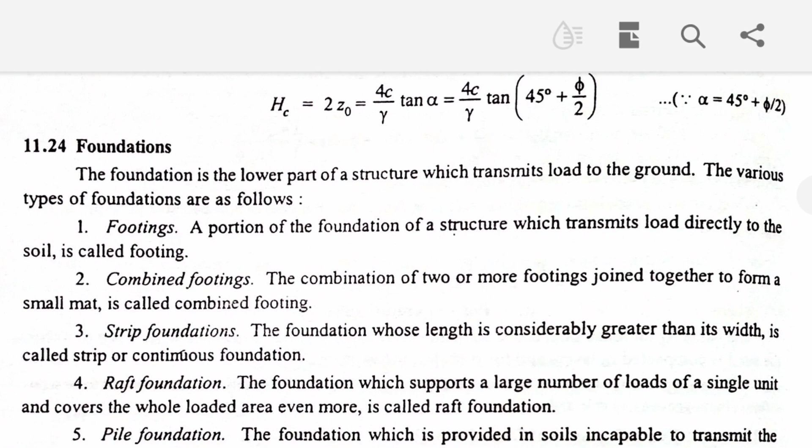देखिए foundation is the lower part of a structure. कोई भी स्ट्रक्चर का लोअर पार्ट, सॉइल को कटिंग करने के बाद फाउंडेशन स्टार्ट होता, which transmits loads to the ground. The various types of foundation are as follows:

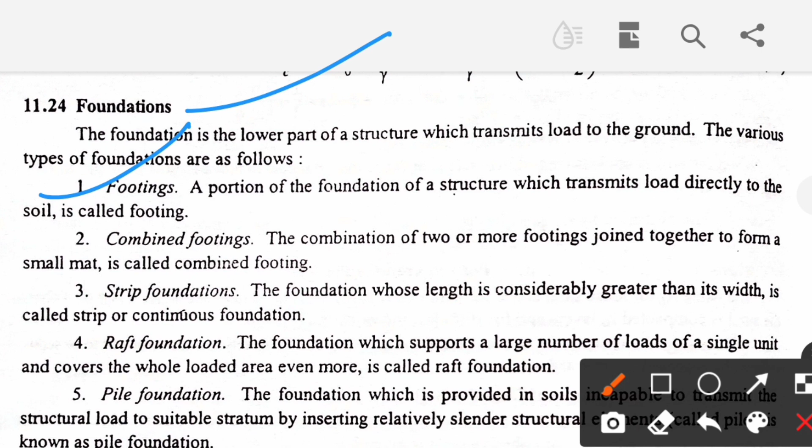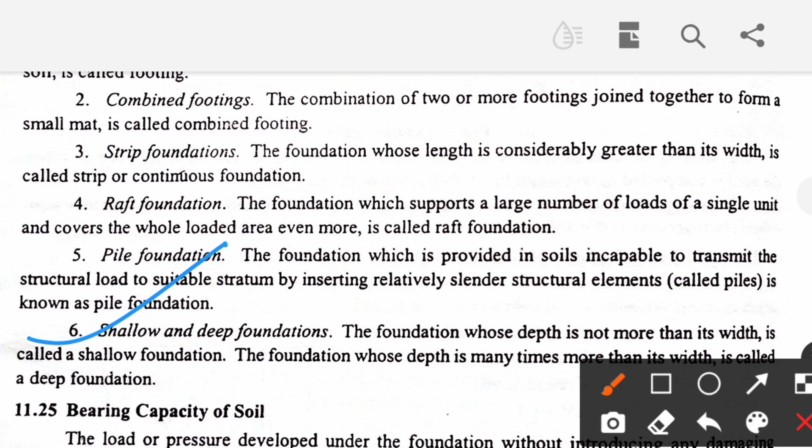Footing, combined footing, strip foundation, raft foundation, pile foundation, shallow and deep foundation. Footing: a portion of the foundation of a structure which transmits load directly to the soil is called footing.

Combined footing: the combination of two or more footings joined together to form a small mat is called combined footing. Combined footing को mat footing भी कहा जाता। Strip foundation: the foundation whose length is considerably greater than its width.

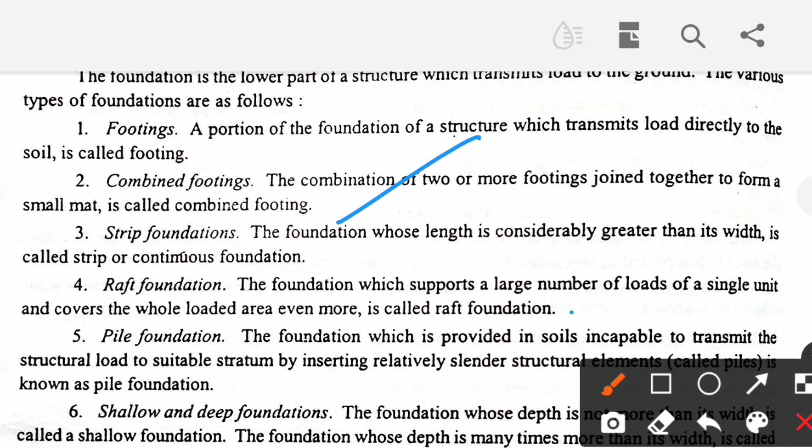Pile foundation: the foundation which is provided in soils incapable to transmit the structural load to a suitable stratum by inserting relatively slender structural elements is known as pile foundation.

Shallow foundation and deep foundation, very important. The foundation whose depth is not more than its width is called shallow foundation. Shallow foundation मतलब क्या, width बड़ा होता, depth छोटा होता, and foundation whose depth is many times more than its width is called deep foundation.

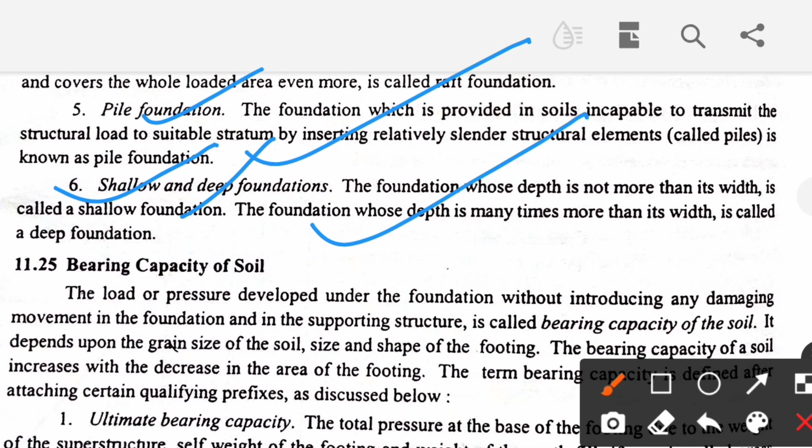उसके बाद देखिए bearing capacity of soil: the load or pressure developed under the foundation without introducing any damaging movement in the foundation and in the supporting structure is called bearing capacity of soil. It depends upon the grain size of soil, size and shape of footing.

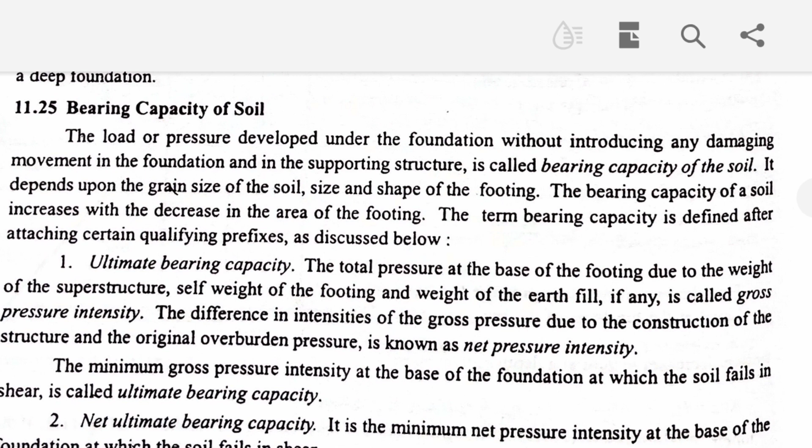The bearing capacity of a soil increases with the decrease in the area of the footing. The term bearing capacity is defined after attaching certain qualifying prefixes as discussed below.

The total pressure at the base of the footing due to the weight of the superstructure, self weight of the footing and weight of the earth fill, if any, is called gross pressure intensity. The difference in intensities of the gross pressure due to the construction of the structure and the original overburden pressure is known as net pressure intensity.

Ultimate bearing capacity: the minimum pressure intensity at the base of the foundation at which the soil fails in shear is called ultimate bearing capacity. Number 2, net ultimate bearing capacity. It is the minimum net pressure intensity at the base of the foundation at which the soil fails in shear.

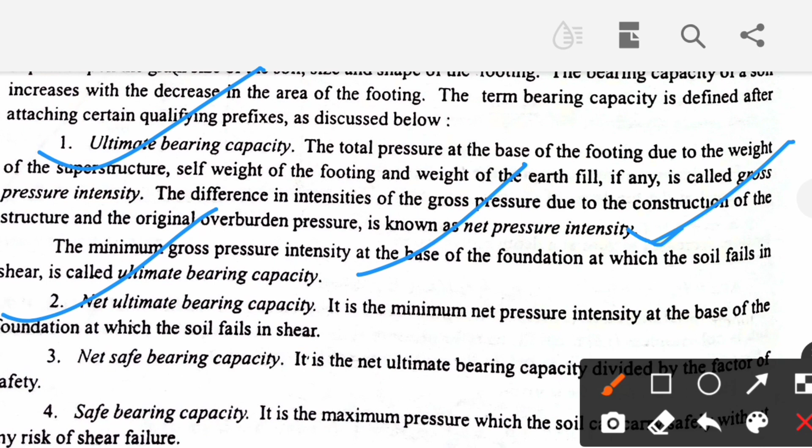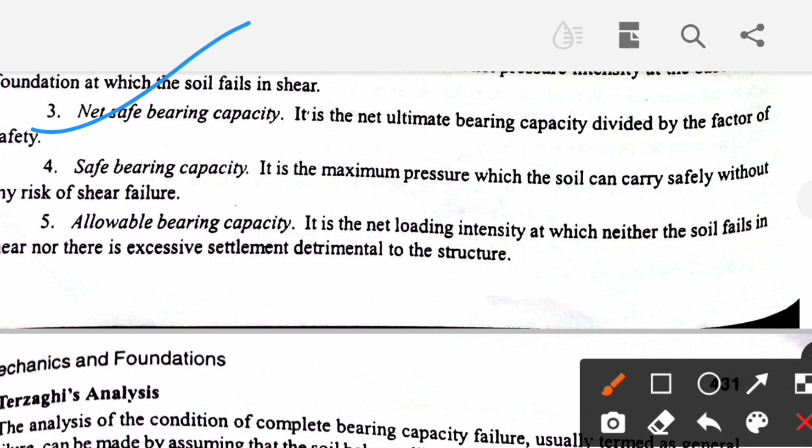Net safe bearing capacity: it is the net ultimate bearing capacity divided by the factor of safety. Safe bearing capacity: it is the maximum pressure which the soil can carry safely without any risk of shear failure.

Allowable bearing capacity: it is the net loading intensity at which neither the soil fails in shear nor there is excessive settlement detrimental to the structure. So guys, that is much for today.